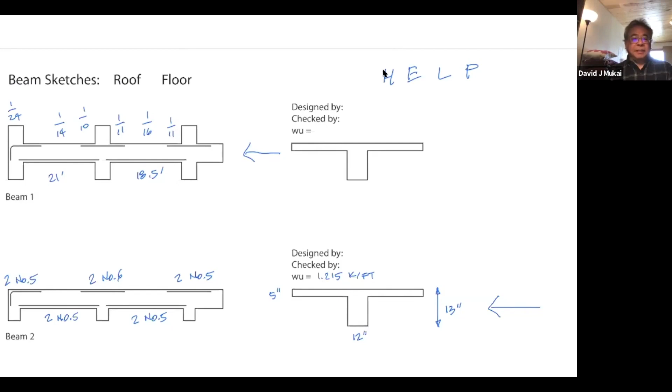So first of all, this is what most of you had for the beams, 2 number whatevers. And so there are no extra bars. There's nothing to cut. So the rule is at least 1/4 of the positive bars have to go from support to support, so you can't cut them. You have to have at least 2 bars for the stirrups. So there's no cutting, they just go all the way.

I think you can get bars up to 60 feet long, because that's the longest flatbed trailer you can pull on the freeway and get off the off-ramp. I think it depends on what city you're delivering to and what the off-ramps are in that town, but I know we've received 60-foot long bars.

Oh, say again? I didn't hear that, what was that? Nothing, I forgot to mute. Oh, okay.

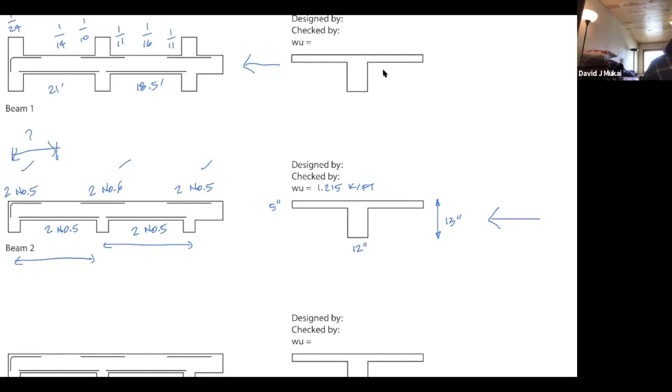So anyway, you don't have to make that 21 feet, 18 feet. What I'm saying is you could get a 60-foot bar, maybe go over 3 foot of the spans, but I don't care, in a project you could just turn it in like that. But you can't really cut those bars, there's only 2. Similarly, there's none to cut here. You can't cut those, but what you do need to figure out, and several of you have asked me this, is how long do you make those bars? And that's what we'll answer today, okay?

So what you need to remember is it's 2 number 5 bars, and the moment diagram was 1/24. In this case, when you're coming into a spandrel beam, it's 1/24. I can't remember what it is if you come into a column, like 1/16, I think, I can't remember the number offhand. So it's 1/24, this one is 1/10, that one is 1/11. And you also need to know the lengths, 21 feet and 18.5 feet. Okay, and so here's the graph.

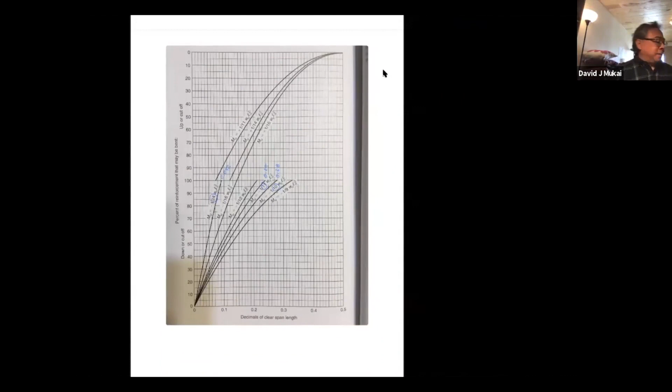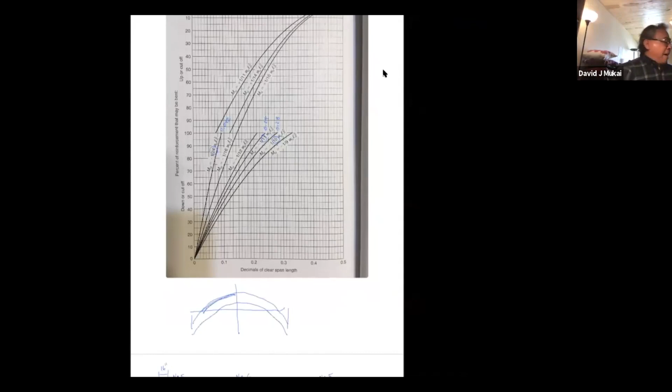So I've scanned it, that's the page from the book. And how this works, it's the moment diagram, so it's half of the moment diagram. That's the worst case positive moment diagram, that's this. This is the worst case negative moment diagram, and it's that.

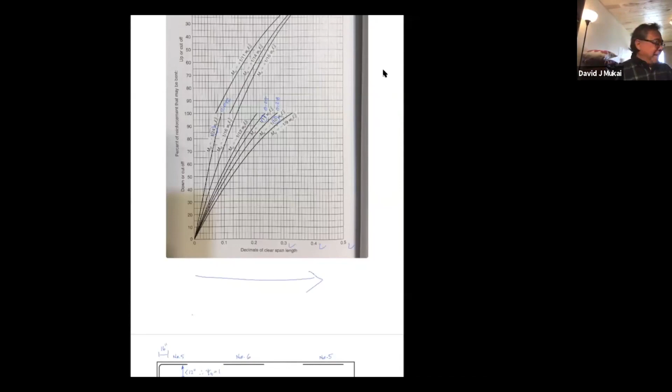And then what this is, this axis, that axis is the percentage of your length, the decimal of your length up to half the span. So that's 0 all the way to 0.5 L. Okay, so it's this, L times L times L, those are L's. This axis, okay, let me blow that up.

Let me try it, there we go. It's what percentage of the MN you can cut off. So if you cut off 100% of the MN, then you're down to 0 moment. This is how far you need to go. If you cut off 50% of your MN, this is where you go. So remember how we did, you found the reduced MN and you draw across and you see where it intersects? This is what it is, you draw across and you find the points.

It depends which moment diagram you have, it's the 1/24, 1/16, 1/12, etc, depends on which one you have. And the only thing is, I would have done it like this: 100, 90, 80, that's the percentage of your maximum moment. But how Dr. Dolan did it, he's doing it by how much you subtract off. So 30 means I subtracted off 30, meaning I'm at 70% of my MN, of my maximum. That's the one kind of hard thing about this, it's going from 0 to 100 instead of 100 to 0. To me it would have been easier if you had done it like this.

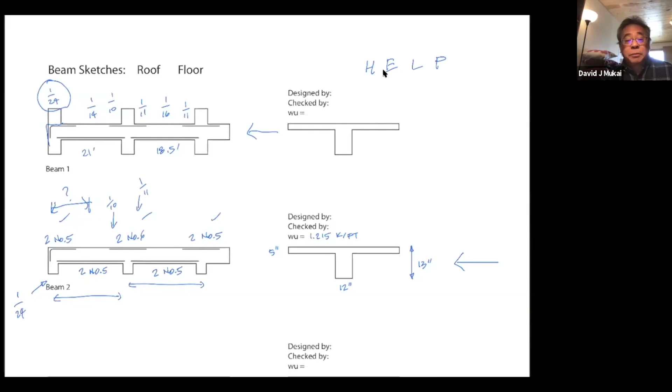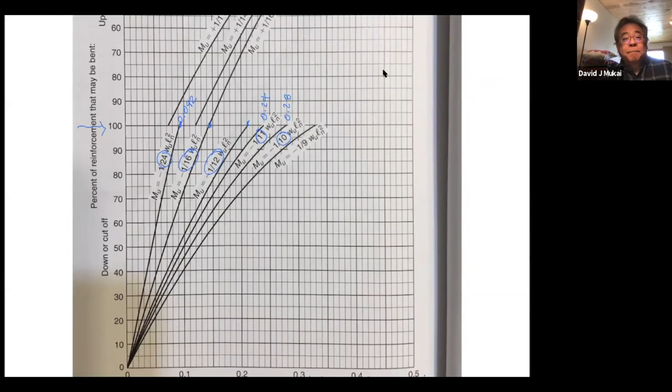So this is how you do that. The first thing is we're looking at the 1/24 line, because of that we had the 1/24 moment over there. We're going to look at the 1/24 moment, and we want to know, if we cut 100% of the steel, where does it go to 0. We want to know here, when it gets down to 0 - that's when you cut off 100% of the moment.

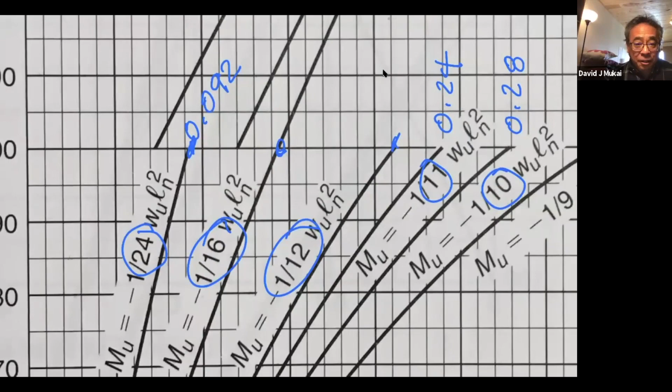If you look, every line here is 0.01, 0.02, 0.03, 0.04, 0.05, all the way to 0.1. I think that is at 0.092 - it's just totally my eyeball on that curve. So remember 0.092.

So there you go, that's how long you make that bar. 23 inches from the face of the support.

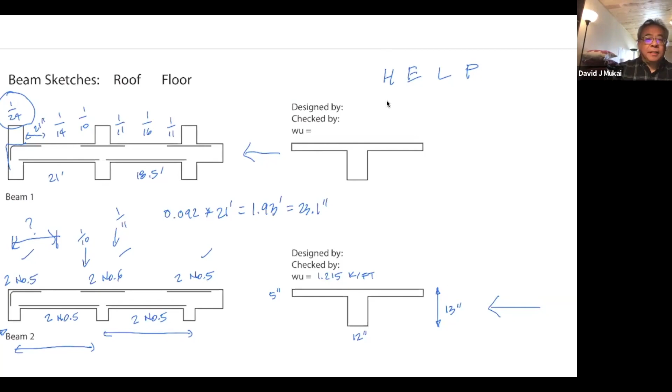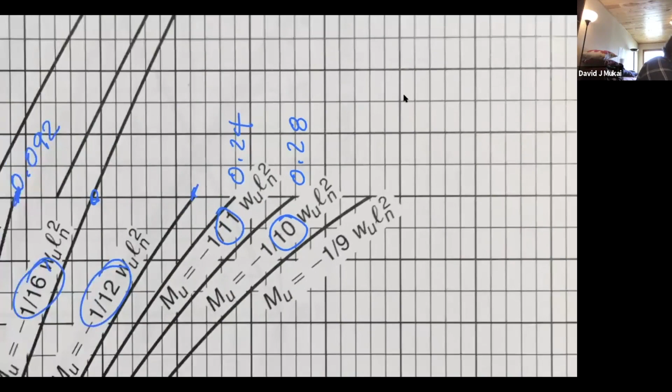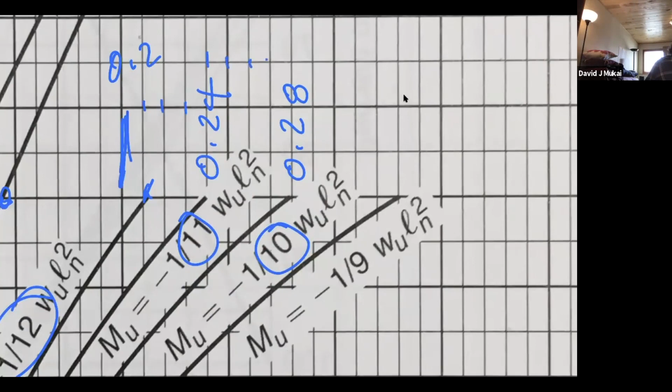Let's do the 1/10 and the 1/11. The 1/10 is 0.28, and the 1/11 was 0.24. Let me check the scale. The 11 is at 0.24 and the 1/10 is at 0.28. 0.21, 0.22, 23, 24, 5, 6, 7, 8. So that's 0.24, I just read it off the graph. So just remember the 1/10 is 0.28 and the 1/11 is 0.24.

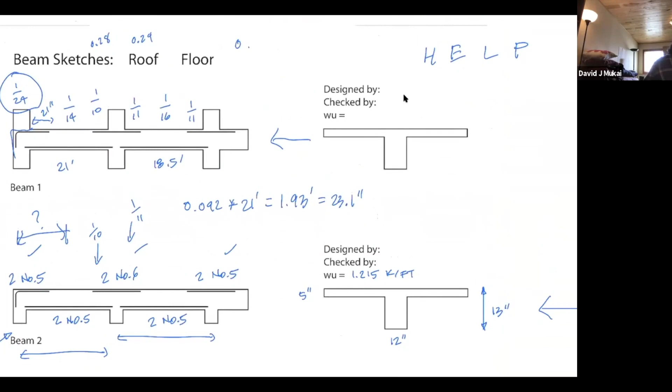28 and 24, 28 and 24. So, 0.28 times 21 feet.

So that's how long that bar is. You add it all up, 71.

And we're assuming those columns are 18 inches wide. We'll have to fix that once we get the column size. But assuming they're 18, I'll add that all up. 143 inches.

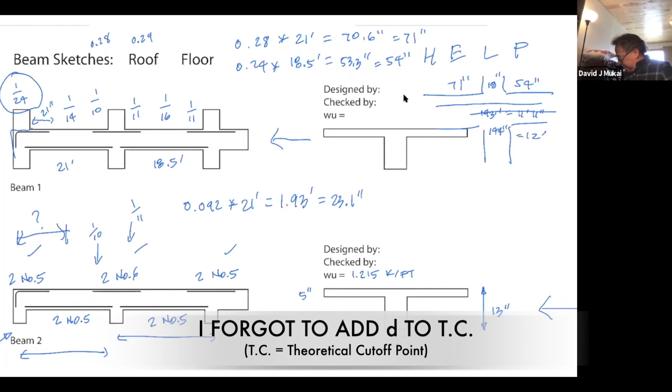I would just make it 12 feet. Okay, so that's that. That's established.

I'm getting a piece of thread stuck in my hand.

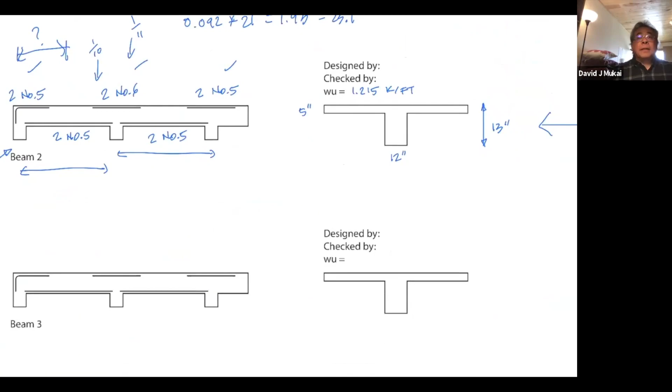Okay, so now let's check the development length. Another super handy thing in this book - he has a table of development lengths, so you don't have to do any calculations.

Can't find it right now, but just believe me, there's a table back here. I'll find it in just a minute. This book is a bestseller for practicing engineers, a lot because of these tables in the back, so you don't have to do any calculations. Oh, here - he has a table here, and it just lists the development length if you know what bar size you have, what F prime C, and what Fy. It's super handy.

Oh, that was compression. Here's the tension - this is the development length in tension. Yeah, it's not that hard, the equation, but I'm just lazy, so I use this table a lot.

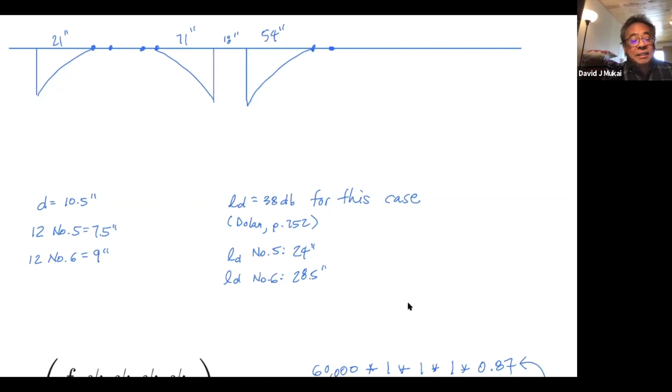Those are the theoretical, and remember you have to go an extra D, 12 bar diameters, or L over 16. By the way, D is almost always greater than L over 16 because D is about L over 10 or L over 12. Anyway, D was 10.5 inches, 12 bar diameters for a number 5 is 7.5. So we're going to add D, 11 inches. Sorry, I forgot that.

So that establishes the theoretical, and then you add the extra 11 inches, okay? And now, check the development length.

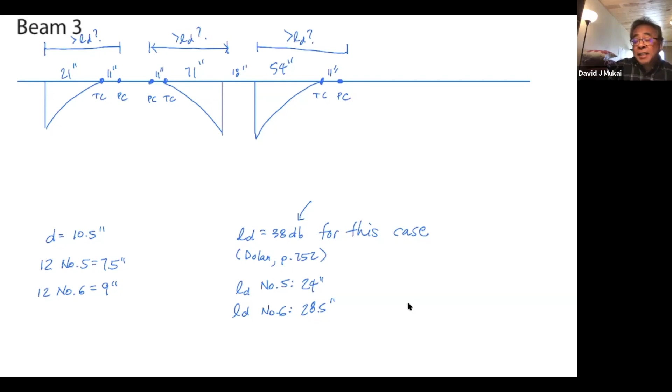This is what I'm saying, I was just too lazy to calculate the formula, and that's what came out of that table I just showed you. So it's just 38 times the bar diameter. And it depends on the table - it asks you, is it a top bar or a bottom bar?

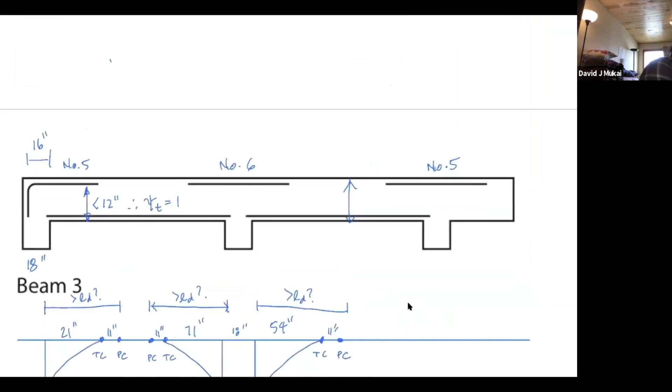Remember, to be qualified as a top bar, you have to have more than 12 inches of concrete below the bar. And this thing was only - how tall was that? The whole beam was only 13 inches deep. Oh, did I read that drawing wrong? Were these beams 18 inches deep? Yes, they're 18. Oh, bummer.

Okay, so the top bars, you have to multiply by 1.3. Let me do that.

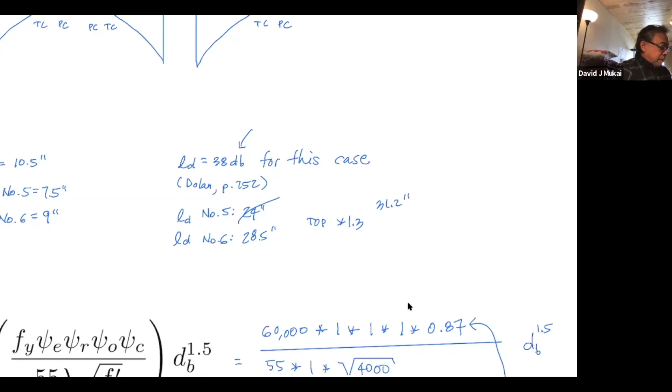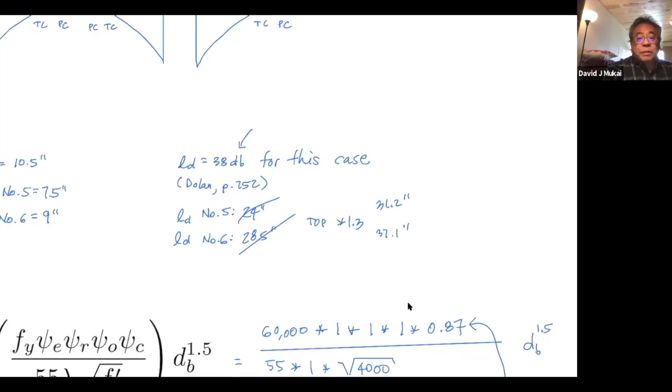Okay, so the development lengths are 31.2 and 37.1. Okay, so this is number 5. LD is we have 32 inches. This is good, just barely.

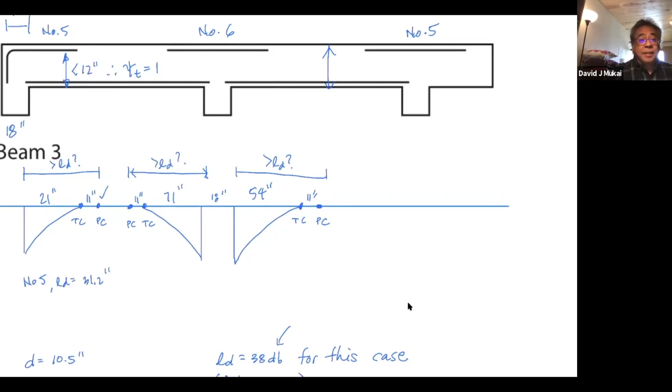These are number 6. That's definitely bigger than 37. So these are good. So the final lengths are now 32.

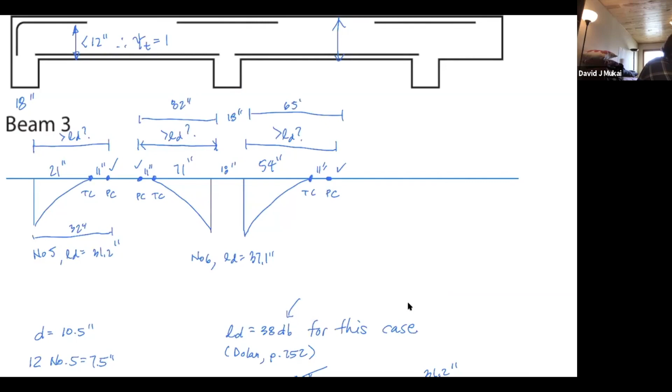Those are the final lengths. I was off by 11 inches earlier. Okay, the last thing to check is that's only 16 inches into the column, because you need a 1.5 inch cover, and you'll have basically a 1/2 inch hoop or stirrup in the column. It's like a stirrup, but it goes on all 4 sides like a square hoop. So you only have 16 inches for your hook, and is that enough to develop the hook?

And so if you watched all those videos, that's the equation for the development length for the hook. So, 60,000, 55 and square root of 4,000, and then you have all these factors. It's not epoxy coated, so it's 1.

This R has to do with confinement. I'll show you the slide for that, but it comes out to be 1. I can't even remember what O stands for. I have slides for each of these coefficients, so we'll go over them. The one I want to point out is the concrete factor. It's FC over 15,000 plus 0.6 if you have less than 6,000 PSI concrete. And so that comes out to 0.87.

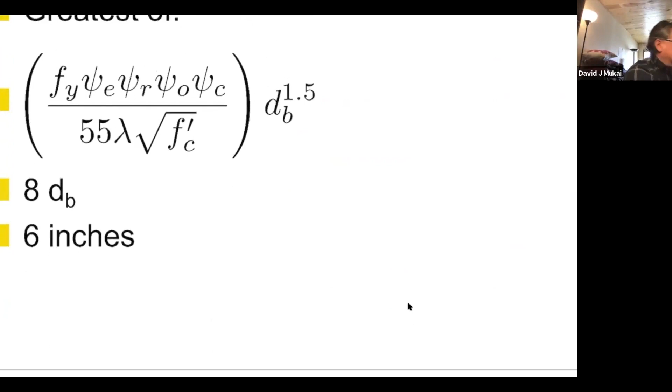Okay, so let me show you all the coefficients, where they come from. Oh, and it can't be less than 6 inches or 8 bar diameters. Okay. Lambda, lightweight concrete, 0.75 regular, 1. Epoxy, 1.2, regular, 1.0. And many of you on your sheet at the very bottom, you have phi mn over mu equals like 1.12. You get to divide the development length by 1.12 because you have extra steel.

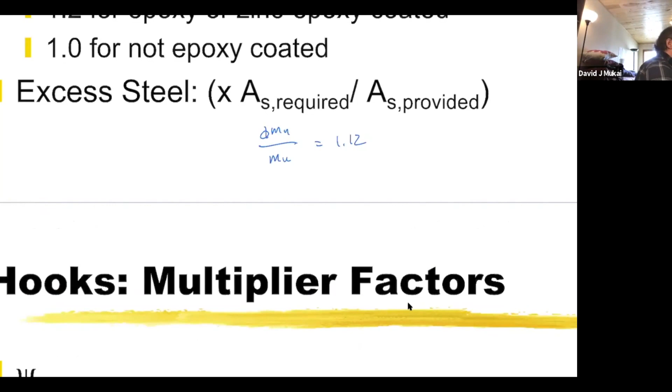Okay, this one, this confinement. This has to do with how much of the transverse hoop steel you have. If that steel is more than 40% of the hook steel, it gets to be 1. Or if you look at the top view of the beam, we have 2 bars. If that space is more than 6 bar diameters, it's 1. And it was more than 6 bar diameters, so it was 1. Okay.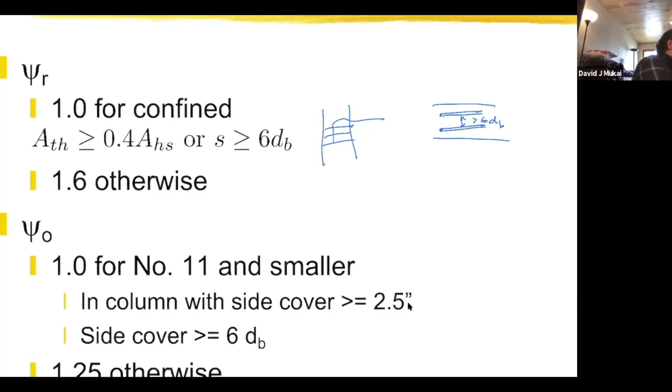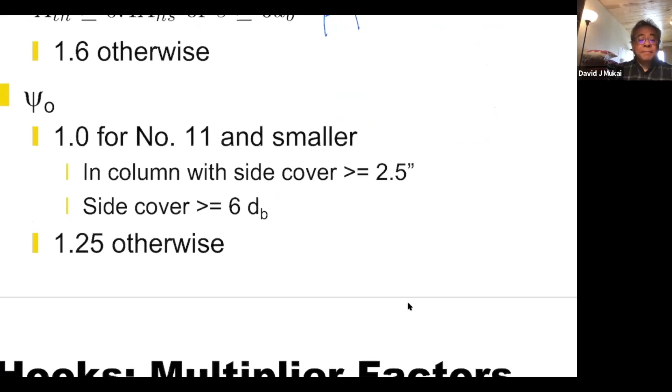And this one was if you had cover greater or equal to 2.5 inches or 6 bar diameters, it was 1 for number 11 and smaller. And so we had more than that, I think. So we'll just call that 1. Okay. And there's the concrete one. So anyway,

I did all that and I came out to a development length of the hook of only 7.5 inches. We have 16, so that's fine. Okay, so that's how you do the bar cutoffs for the beams. Okay, you just find those lengths on the graph, add D, and make sure it's greater than the development length.

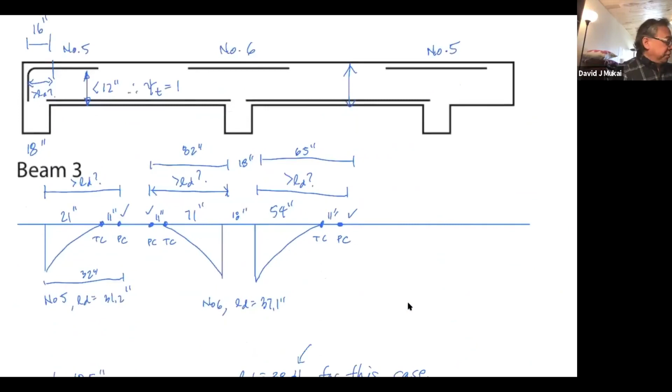The girders are a little more challenging. So here's a girder design. Because the girders had bigger loads, sometimes you had more than 2 bars. And so this example I picked, there were 3 number 8s on the left, 3 number 8s on the bottom, 6 number 7s over there, and 4 number 8s over there.

And this student had a nice spreadsheet that had all the phi mn's at the bottom. So I just copied those down. Just make sure that when you do this, you do mn. Make sure when you calculate A, you're using the correct B. You know, for the positive moment, it's B effective. For the negative moment, it's the B web. But anyway, and here are all the dimensions, okay, here.

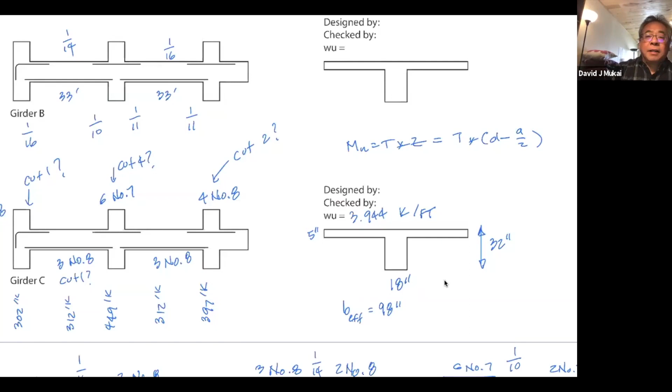Okay, so now each have extra bars. On the left side, there are 3 number 8s. I'm gonna cut 1 of them. On the bottom, there's 3 number 8s. I want to cut 1 of them.

Okay, so at this one, you have several choices. You could cut 2 of them. You could cut 4 of them. I think that's your only choices if you want to keep symmetric. So I'm going to see if we can cut 4 of them. And then 4 number 8s, can you cut 2 of them? Okay,

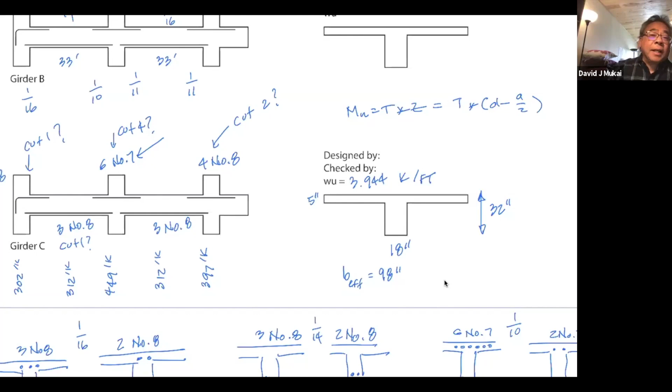So this is what I tried. Okay, I'm only going to do 3 of them, and this part is the same. Like ones you don't cut, how long do they go? It's just like the one I just did, the previous one I did. So what we're gonna add on this one is, can you cut the bars? Okay.

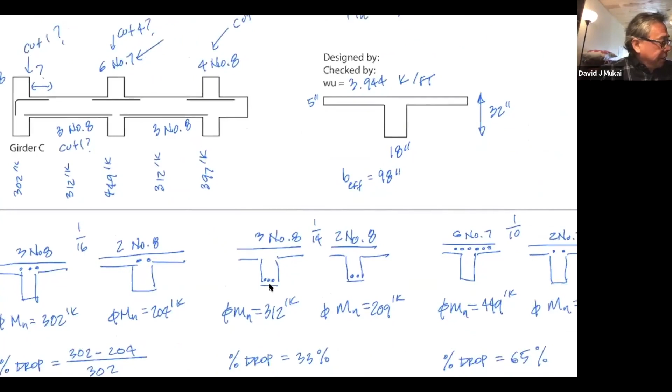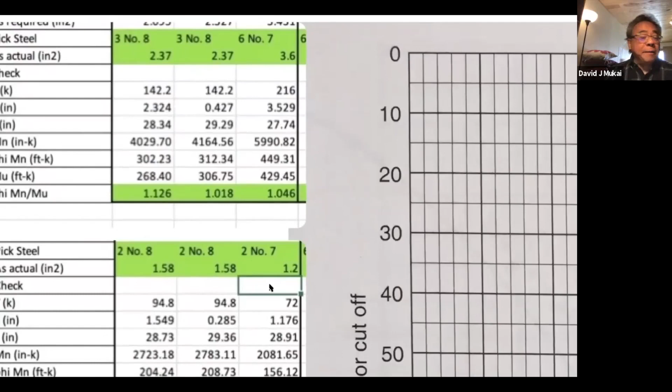This student had a really nice spreadsheet. I wanted to know, if I go down to 2 number 8s, what's the new phi Mn? But I was too lazy to do the calculation myself. Most of you have this, where you check at the end, if you have 3 number 8s, what's the phi Mn? So I just typed into the spreadsheet the reduced number of bars, and I got the new phi Mns.

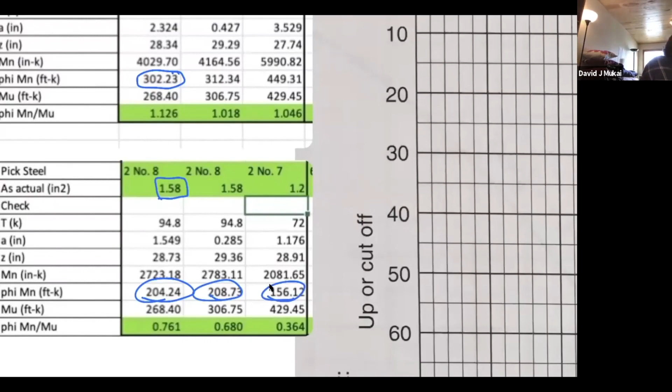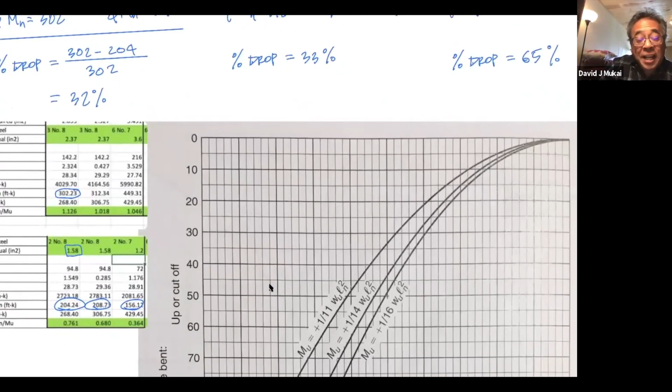It was 302, it went down to 204. This was using 1/16 now instead of 1/24. By the way, this student's spreadsheet had the denominators at the very top, that's how I knew what they were.

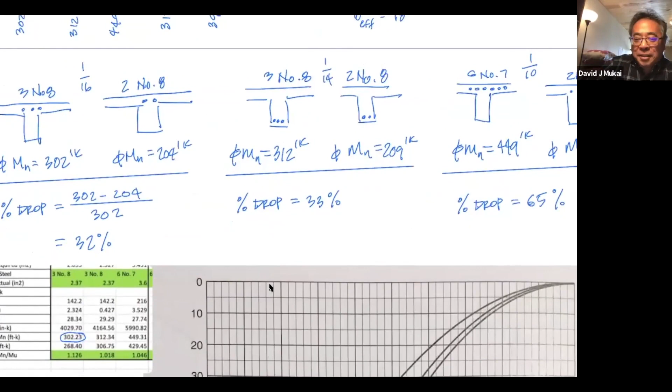It was 312. It went down to 209. It was 449. It went down to 156. Now, I guess what Dr. Dolan said is true. When you go from 3 number 8s to 2 number 8s, you're dropping 33% of the steel. The MN drops 302 minus 204 divided by 302, that's 32%. So there's no difference. 3 number 8s to 2 number 8s drops 1/3, that's a 33% drop.

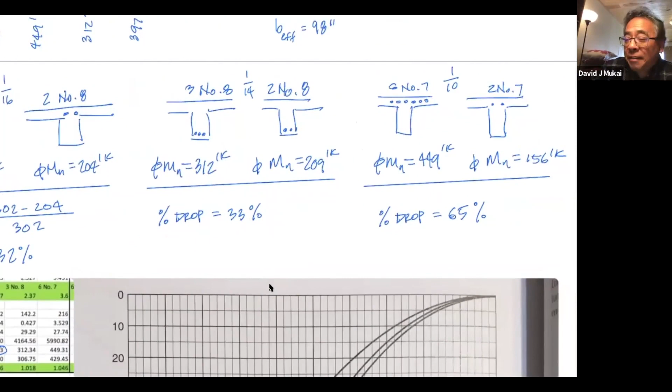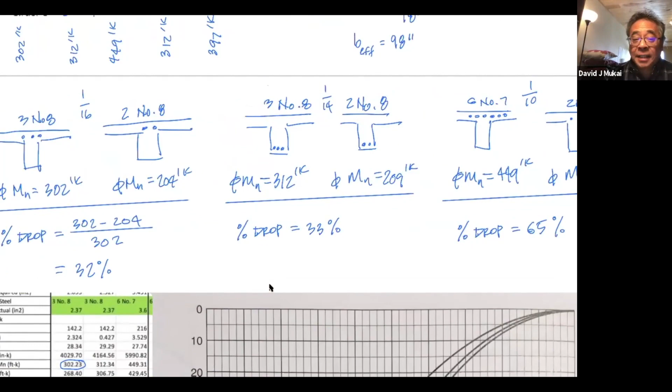6 number 7s to 2 number 7s, you're dropping 2/3 of the steel, and it drops 65%. So I guess what Dr. Dolan said is correct. If you just take the percentage of steel you drop, that's pretty close to the percentage of MN you drop. So on the 1/16th graph, we're gonna drop 32% of the MN. This isn't the most exact thing, so the difference between 32% and 33% I don't think is that big a deal.

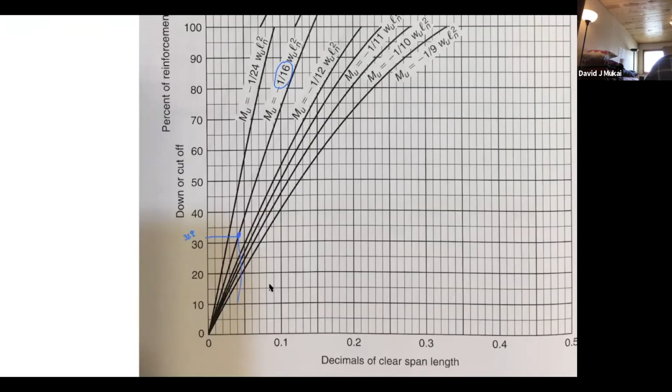Okay, to me that looks like 0.042. So the theoretical cutoff point is 0.042 ln.

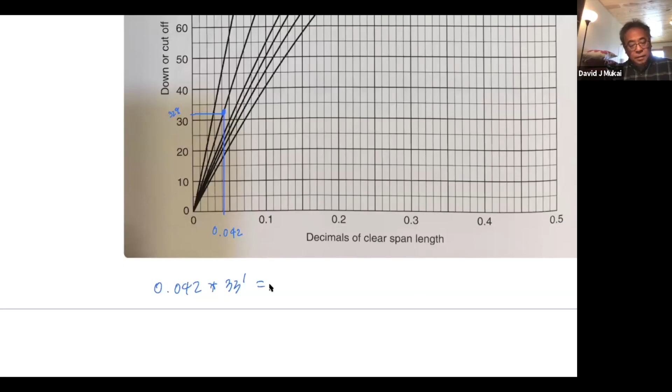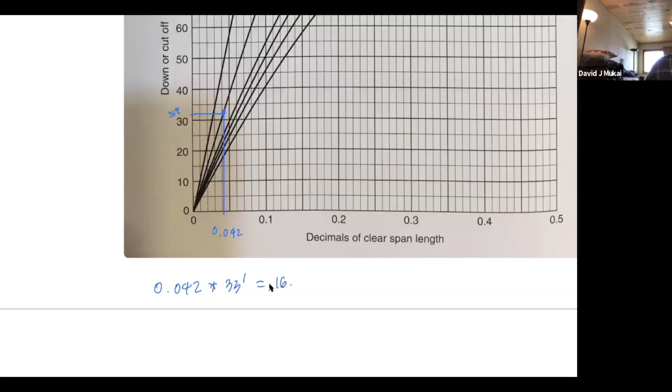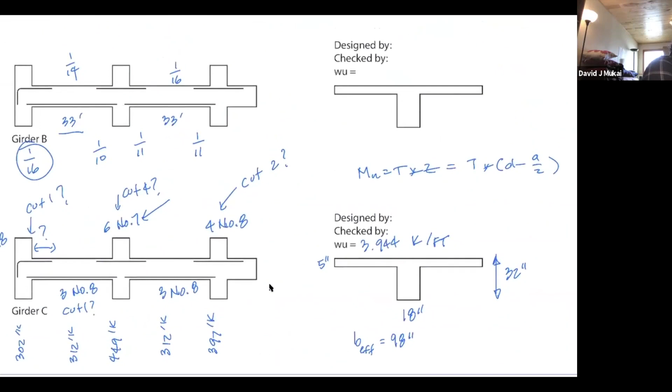Let me draw that here. The proposed cutoff point is going to be that plus D. It's going to be at 46.1.

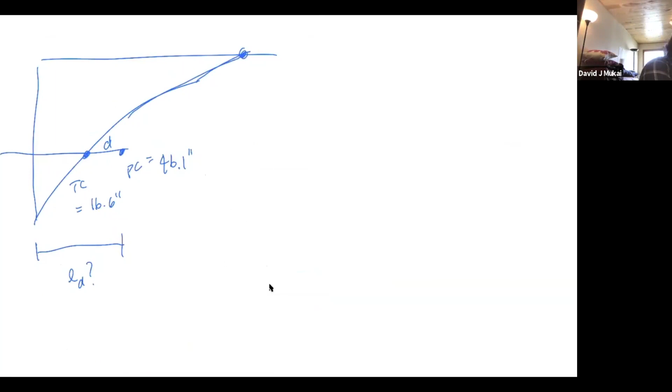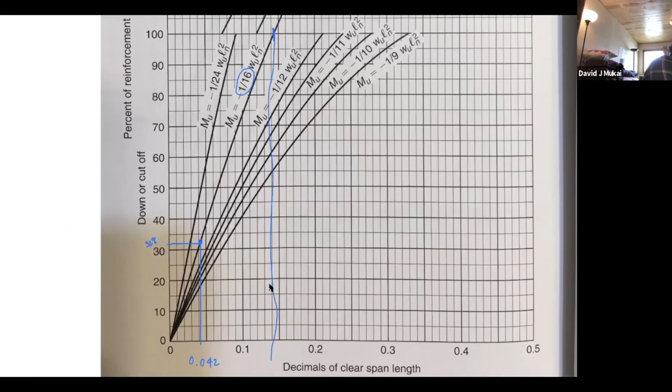So the question is, is that more than LD? And if it's not, you have to extend it. I'll let you figure that out. Let's find that point. That looks like 0.143 to me.

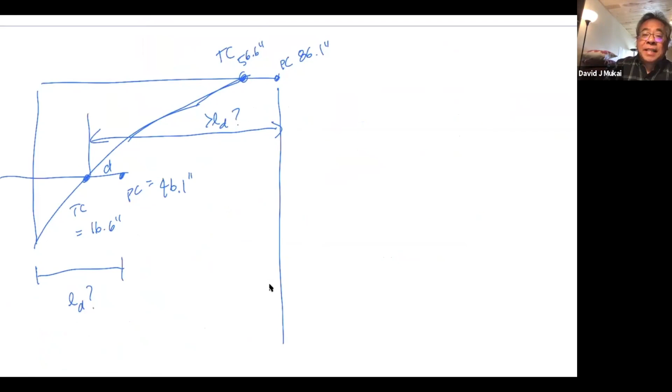And remember, from there to the theoretical point of the other one has to be greater than LD. We need to check development length. These are number 8s, on the top.

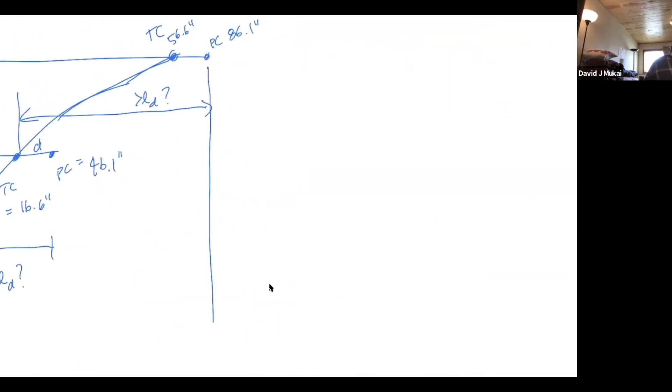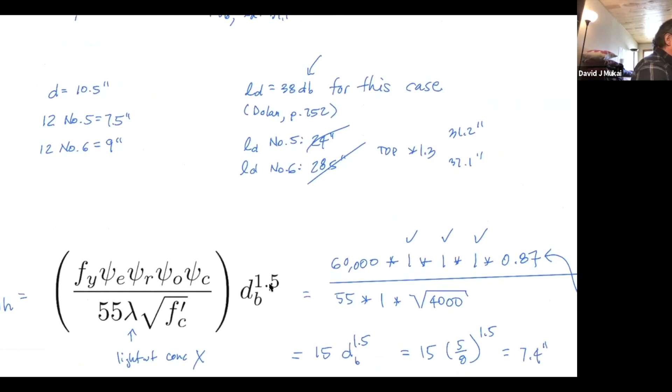I'm lazy, I'm just gonna look it up for you in the table. I can't even remember the page number - page 252. I'll also scan this page for you, page 252. Or I'll just make a spreadsheet for it.

Top bar, number 7 or larger, with minimum stirrups. So the development length is 62 inches.

Well, the diameter of a number 8 bar is 1 inch. So you wanted to cut it at 46, but you can't, it's at 62. That distance there, that's going to be close.

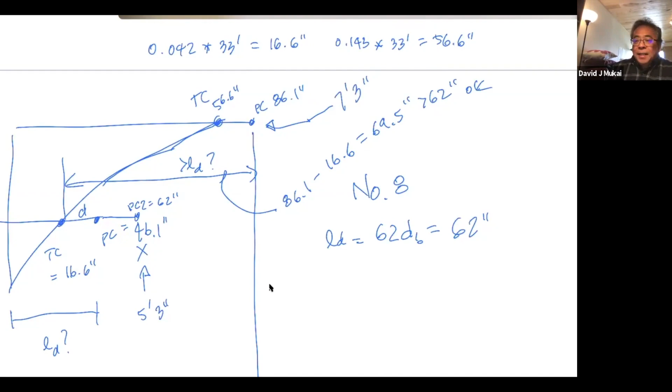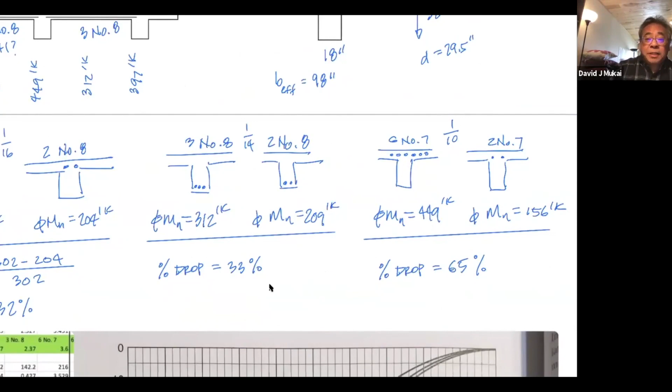Let's try the positive steel. You had 3 number 8s, but you want 2 number 8s. You're gonna cut off 33% of the positive steel, and this was the 1/14 moment diagram. 1/14 positive, cut 33%.

Oh, that's a long way to go down there. I'm gonna just read the numbers off. To me, that looks like 0.283. That's 112 inches. So this one's that's 112 inches there. You need to add D that way, right?

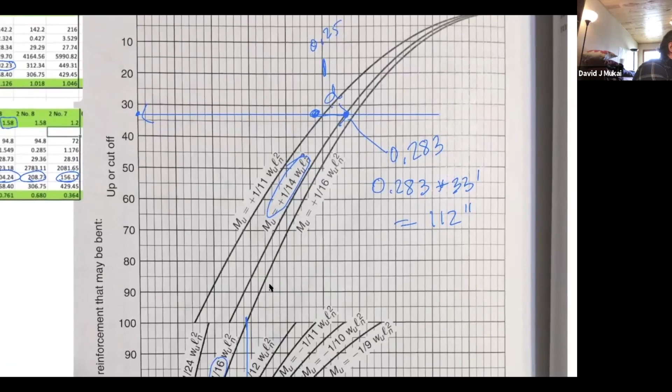Okay, so let me redraw this. Remember, 112. Obviously not to scale, let me try that again.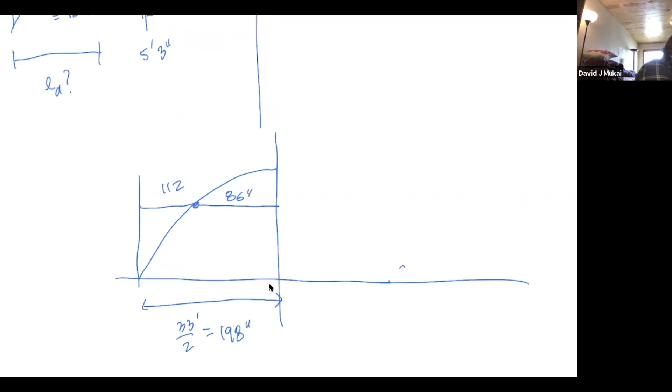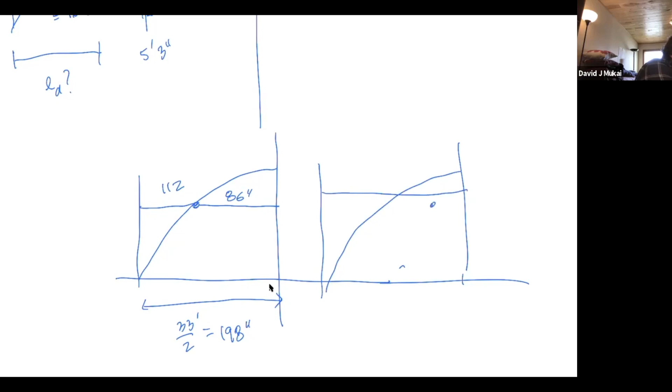Okay, closer. Because we're measuring from the maximum, so we need to know the distance from the middle to the point. I'm going to add 29.5 to that.

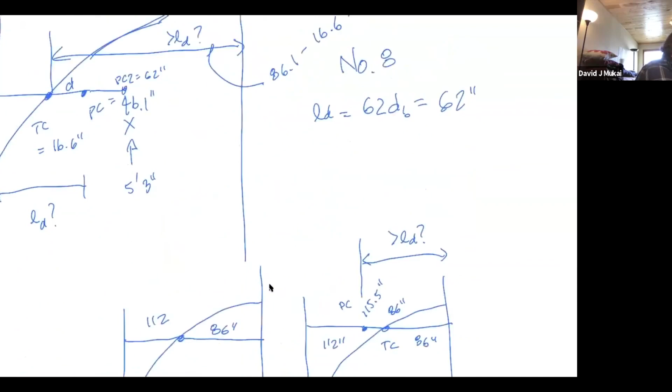Is that greater than LD? So for a number - what are these? These are number 8 bars on the bottom. So number 8 bars on the bottom, I'm gonna use this table again - bottom bar, number 8. So the development length is 48 inches.

That's good, 115 is way more. The next question is the ones you're not cutting to here - that's bigger, right? That's bigger, so that's definitely greater. Okay, so we're fine. I'm gonna round this to the nearest 3 inches, 115 inches.

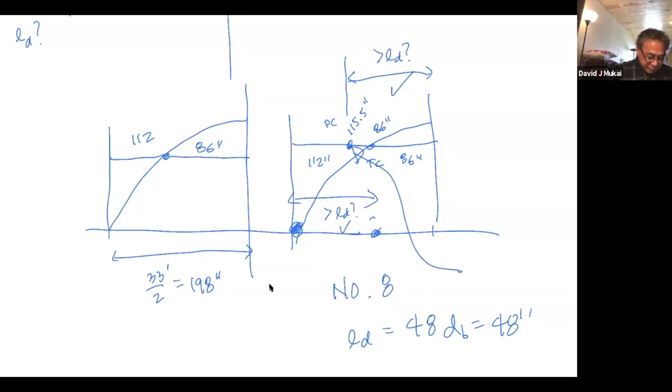It's 9 feet 7 inches, so 9 feet 9 inches. Okay. And that's how you do this.

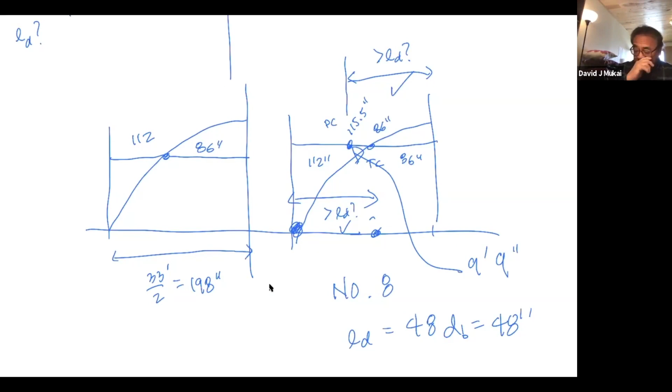So the key to this is I would do the homework first so you understand the theoretical and the practical before you try this. And then when you try this, the key is to get your theoretical cutoff point, you just figure out what percentage of steel you're dropping off and go across.

So this can be, we proved that percent steel cutoff is the same as percent MN reduction.

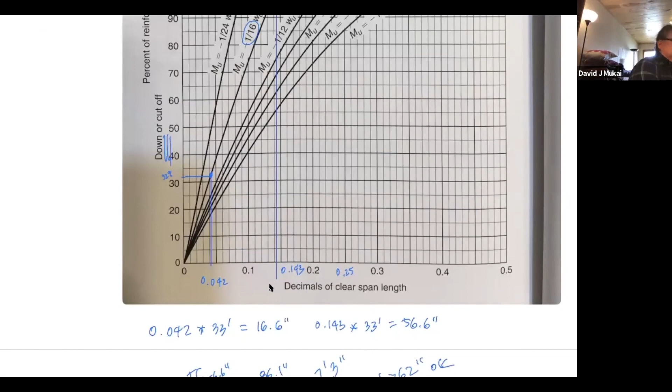One last comment that is outside the scope of this class, but it's pretty cool, is this. And so if you're really, really clever, which some of you are, but it's too late now because you've already designed the beams.

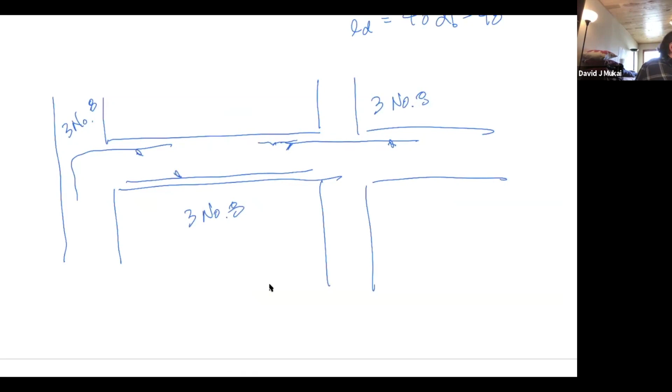Let's say you had 3 number 8s, 3 number 8s, and 3 number 8s. But eventually you're going to cut off to 2 number 8s and 2 number 8s like that. The 1 bar that you're cutting off, you can do this.

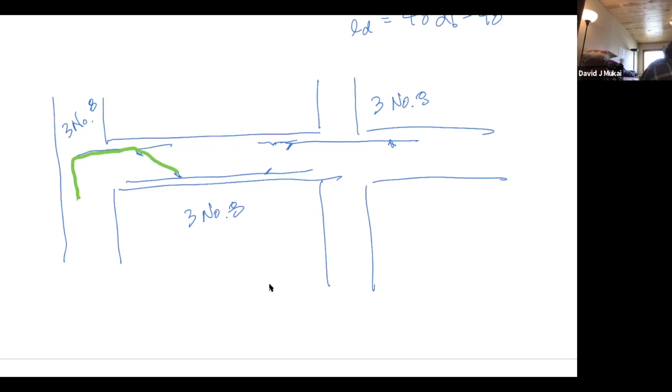I'm going to use green. So if you're really clever, that 1 bar you're cutting off on the top and the bottom, you can make that bar look like this. So that 1 bar starts as a top bar, bends down to a bottom bar, and bends back up to a top bar.

And so if you're clever, you could do that. And it takes a lot of thinking. And that's where these graphs come in handy. So basically what you're doing is you come here with this 33%, add your D.

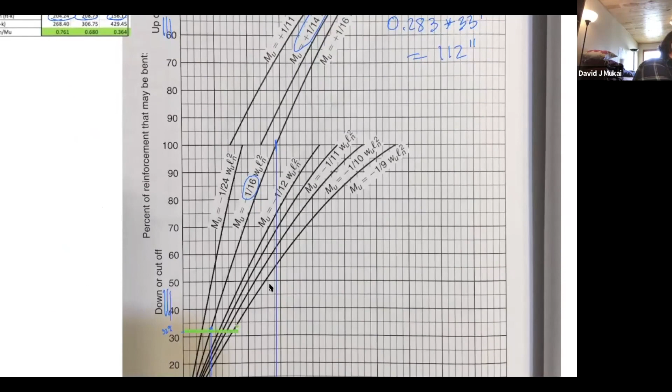Come here, and then I'm going to shrink this. And then you're going to bend it like that. And that's why he's made this graph to look like this. So you could figure this out just by looking at the graph.

This is a super, super handy graph. But at the time, it was just way too much to explain. And it might be confusing you right now, but that's what this graph is for.

So you can say, oh, I'm going to cut X% on the top and the bottom, and I'm going to bend it down or bend it up. And so, in the US, our moment diagrams are upside down, negative moment is on the bottom, but the steel is on the top. And so in other countries, this graph is upside down, and that green line looks exactly like what your bars look like. It's exactly how the bars would bend in your beam.

So anyway, that's total bonus. And there was no way I could have explained this, this was like 10 weeks ago when we were learning this. But now that you know everything, if you could go back in time and you picked the same size bars, tops and bottoms, and the same numbers, you could, I don't know if it's even worth it to do this. And really, I don't think this is a standard practice in the US.

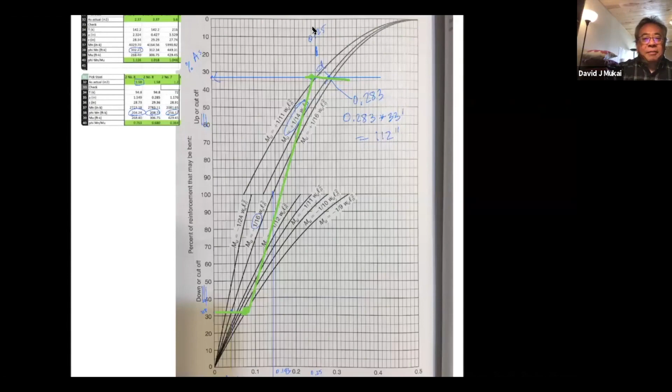That's bonus. That's what this graph's for. And I'm going to try and reproduce this graph on Excel. But in the meantime, I'll just scan it so you can have it.

Okay, so that's how to do bar cutoff for the project. And I'll post the link to this so you can have it right away with the password this time. And then eventually I'll turn it into a VidGrid video. And this is the end of bar cutoffs, and next topic is deflections.